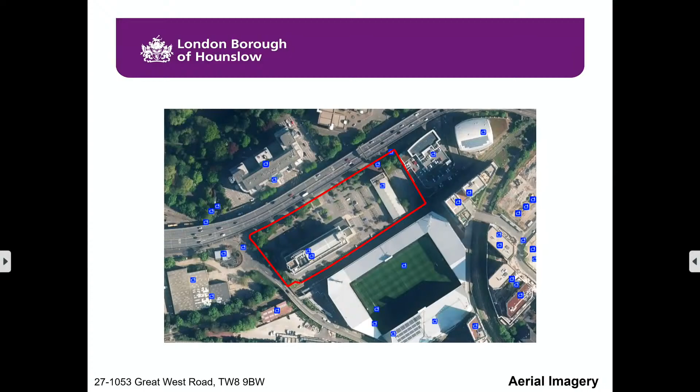27 Great West Road, now shown on the screen, is a 7-story multi-let office building that was formerly the Sega HQ. It's comprised of almost 12,000 square meters of office floor space and has the frontage and vehicular access from a roundabout on Lionel Road South. The building is currently only partially occupied.

1053 Great West Road is a part 1-story warehouse comprised of 1,481 square meters of floor space, with the lawful use being Class B8.

The site is within the Great West Corridor opportunity area, which is allocated to deliver 7,500 new homes and 15,000 new jobs. An outline of the opportunity area is now shown on the screen.

The site is also proposed to be released from its existing LSIS designation within the local plan review and is to be allocated Site 28 within the emerging local plan to provide a minimum of 500 homes, 990 square meters of retail floor space, and 18,870 square meters of business floor space.

This emergent allocation is considered to have moderate weight in the determination of this application due to its relatively advanced stage, with the local plan review now submitted to the Secretary of State.

The proposed development would accord with the majority of the requirements of the site allocation. It would deliver an appropriate quantum of housing together with 1,195 square meters of retail and F&B floor space and 4,259 square meters of industrial floor space that would meet identified need and provide employment floor space in line with the objectives of the allocation and the opportunity area.

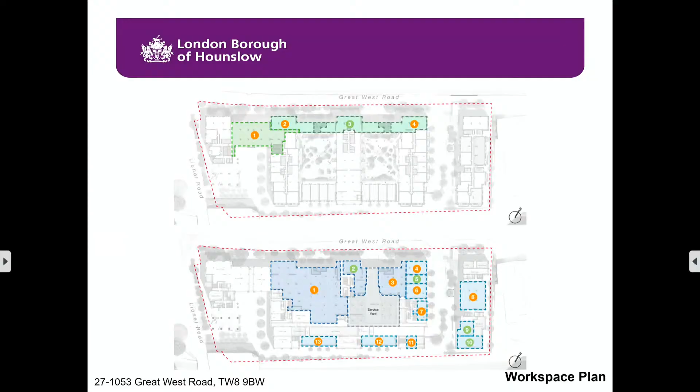The scheme would also provide active frontage to the Great West Road and the new public square, and would successfully co-locate the delivery of new homes with the continued provision of employment space, therefore positively responding to the allocation.

The scheme being presented this evening is the product of a close to 2-year determination period, with 13 PPA sessions between the council and applicant prior to submission and over the course of the determination period. The meetings held during the determination period focused on building heights, townscape and heritage views, urban design, placemaking and built form, residential quality, affordable housing and viability, environmental impacts and the public benefits.

These discussions were also informed by the consultation responses from statutory and key stakeholders.

Wholesale amendments were then received in November 2024, which included the reduction of height across blocks A, B, C and D of up to 20 metres, reduction of 60 homes, increase in height of block E of +3 stories, podium setback up to 6.5 metres away from the Great West Road, introduction of a new arcade link between the Golden Mile Square and the Great West Road.

Additional TfL safeguarding land, increase in public realm and open space, increase of communal amenity space, 12+ play space provided on site, and the affordable provision maintained at 35% with an increase in social rent based on habitable room calculations.

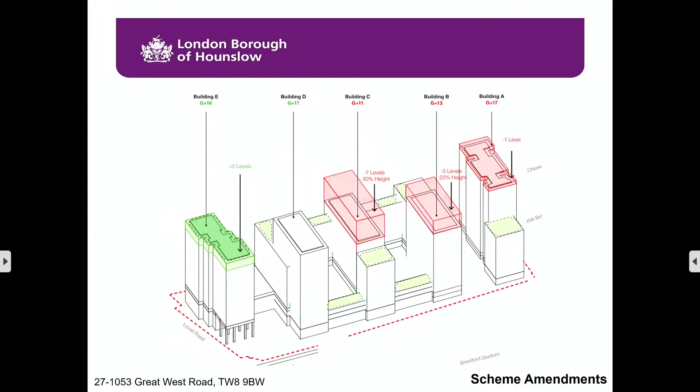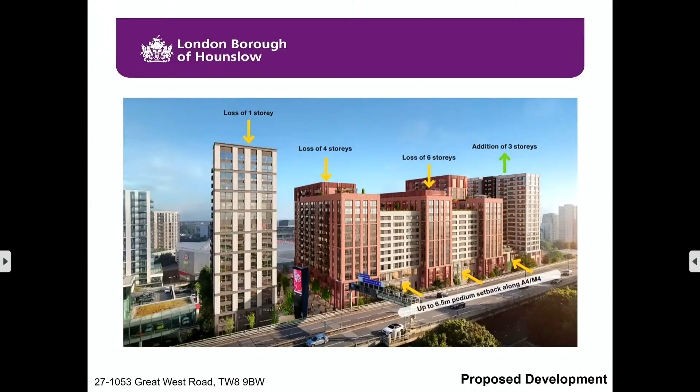Further amendments were also received in July 2025 to address objections from Brentford Football Club related to counter-terrorism, following a series of meetings between the council, the applicant, Brentford Football Club, and the counter-terrorism security advisors, the CTSA, who are part of the Met Police.

Following the submission of the revised scheme with relocated balconies, Brentford Football Club removed their objection to the proposal and provided a letter setting out their support for the scheme on the basis that the following conditions and obligations are secured: restricting the hours of construction work, restricting access to the roof space and roof terraces during match days, the recording of fob access subject to balcony screening being installed prior to occupation, and management agreements for the construction and operational phase.

These conditions and obligations have been agreed by the applicant and shall be secured by the permission and associated legal agreement. Given the club and applicant are in agreement regarding the proposed mitigation measures, and subject to the conditions, the CTSA do not object to the scheme in this regard.

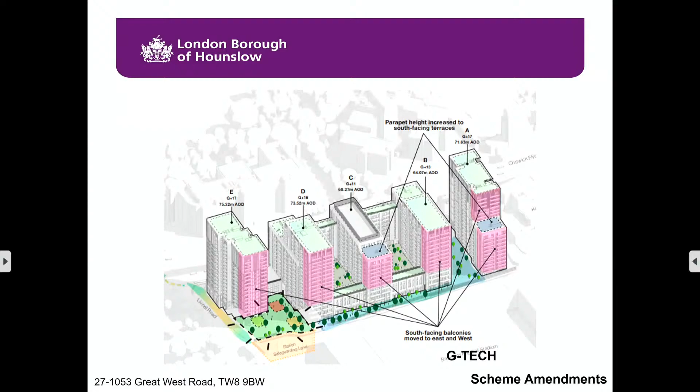Conditions will also require the submission of further details in relation to the public square and will require a gold Secured by Design accreditation to be achieved.

The clean air route is also shown along the southern side of the site to provide pedestrians with an alternative to the Great West Road. The proposal would also safeguard the land for the development of the future Lionel Road station, as shown on the bottom left-hand side of the screen.

The overall provision of affordable housing would be comprised of a 49-51 split between social rent and shared ownership homes on a per unit basis, and a 52-48 split on a habitable room basis, equating to 130 social rented dwellings and 136 shared ownership dwellings.

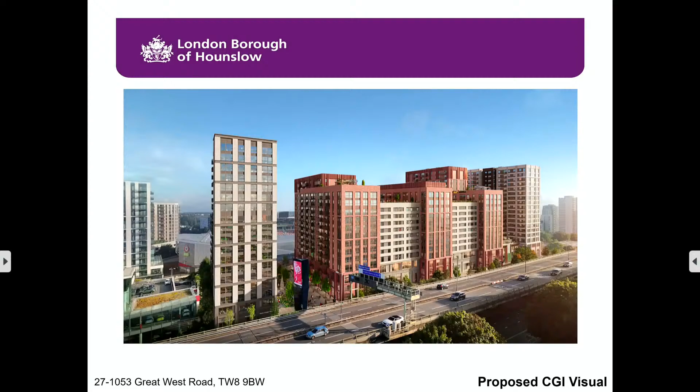On balance, it's considered the height, scale, and mass of the proposed development would relate successfully to its context, while optimizing the development capacity of the site and seeking to protect occupiers from adverse environmental conditions. The materiality and detailing, the identity and character, movement patterns, and landscape design all ensure that high-quality development would be delivered.

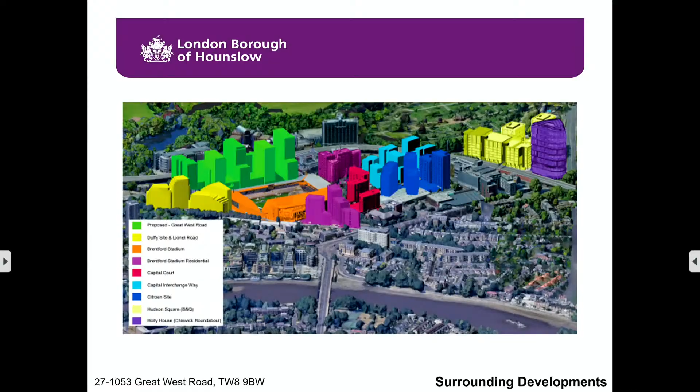For the heritage impacts, the significance of the affected heritage assets and the full objections received from consultees are set out within my report. But to remind members, objections have been received from Historic England, ICOMOS - the International Council on Monuments and Sites - Royal Botanic Gardens Kew, the Kew Society, the Gardens Trust, Historic Buildings and Places, the GLA Conservation Team, London Borough of Richmond upon Thames, and the Strand on the Green Association.

Starting with Royal Botanic Gardens Kew World Heritage Site and the assets within it, the amendments to the massing and scale of the proposal sought principally to further reduce or, where possible, remove the impact of the proposed development upon the setting and the outstanding universal value of Kew Gardens World Heritage Site.

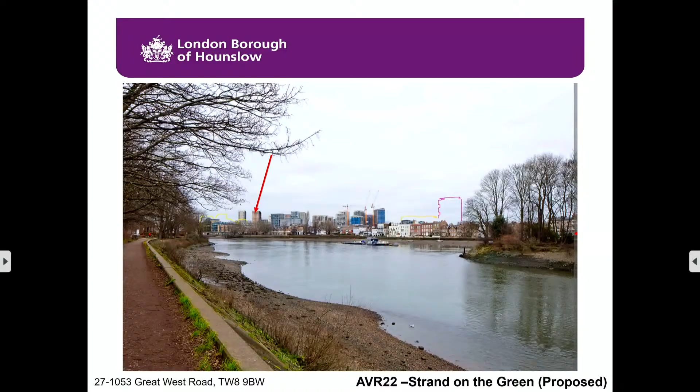Enhanced single aspect units incorporate secondary openings, and some other single aspect homes have oversized internal floor space, generous floor to ceiling heights, and oversized external amenity space where appropriate. Mechanical ventilation and cooling measures further ensure a high standard of internal environmental quality.

The daylight and sunlight assessment demonstrates that the majority of homes in the scheme would achieve appropriate levels of natural light. Where shortfalls occur, they are relatively minor and often mitigated by design features such as balconies and generous outlooks.

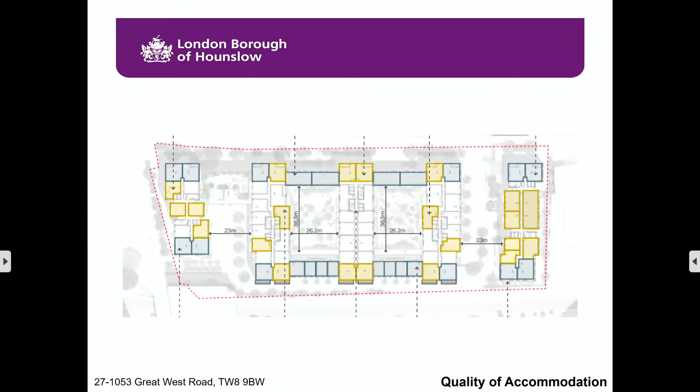Given the site's urban context and its allocation for significant growth and the benefits of delivering high-density housing in a highly accessible location, the scheme is considered to provide appropriate daylight and sunlight levels for future residents and represents a balanced and acceptable approach.

The primary aspect of the proposed dwellings would be to the west and east, with secondary aspects to the north or south, depending on the location of the individual homes.

The figure on the screen illustrates the separation distances between the proposed blocks, showing distances between 23 and 36.3 meters from each other, comfortably exceeding the 18 to 21 meters recommended as acceptable residential relationships.

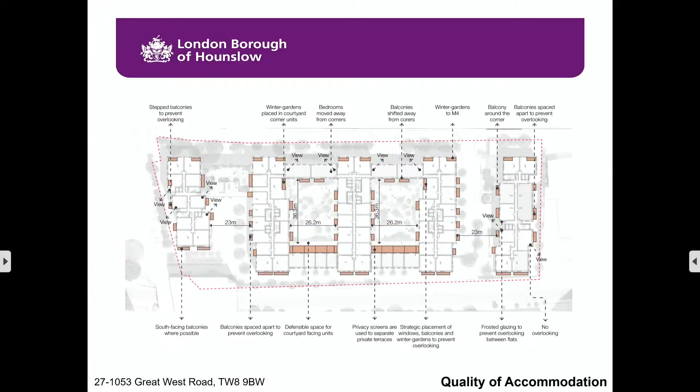The position and orientation of existing habitable room windows in the vicinity of the subject site would also ensure that future occupiers would have adequate levels of privacy, and all dwellings would be afforded with sufficient outlook.

The submission demonstrates that existing and future levels of noise and vibration associated with the freight line, as well as the future WLO station, WLO line, and the noise from the Gtech Community Stadium would be appropriately mitigated in accordance with the agent of change principles.

All 856 units across the development are expected to comply with Part O overheating risk after the proposed passive and active measures are applied, and the new homes would not be exposed to adverse air quality conditions.

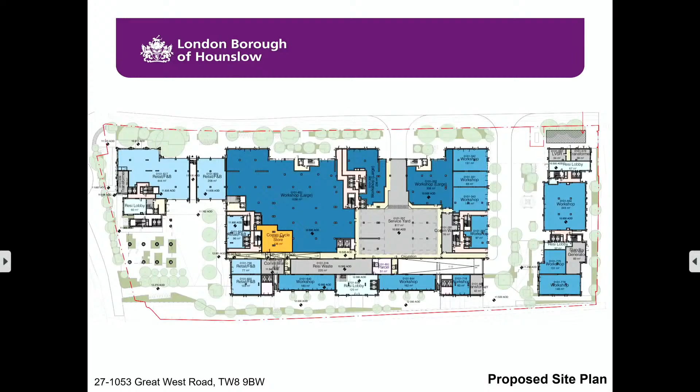Of the 30 blue badge spaces, 28 would be designated for the residential element, while 2 would be allocated for commercial staff. 20 EV charging stations would be installed, with the remaining fitted with passive provisions.

For the residential element, the proposal would provide a total of 1,324 cycle parking spaces, split 20% Sheffield stands, 5% extra large cargo spaces, and 75% two-tier stands, although this does fall short of the policy requirement by 190 spaces.

The design and layout of the cycle store have been developed with the intention of providing a suitable split of Sheffield stands, as well as standard separation distances to ensure the cycle stores are sufficiently accessible.

Given the constrained nature of the site and the context of the development, it's not possible to increase the quantum of parking without compromising accessibility. Given this, coupled with 87% of the policy requirement being delivered in an accessible layout, the quantum is on balance considered acceptable.

The travel plan, which shall be secured through the Section 106 agreement, shall also include monitoring arrangements to ensure that further cycle parking could be introduced should demand dictate.

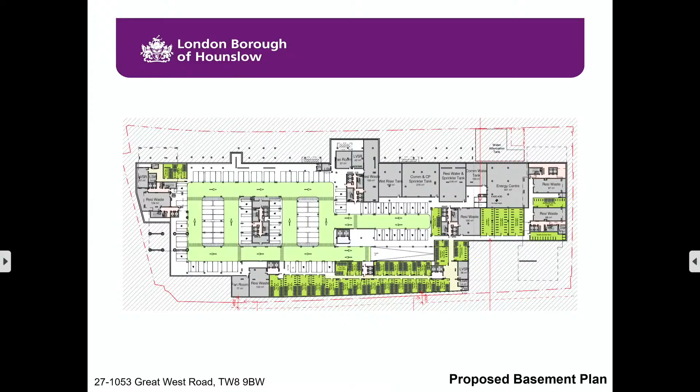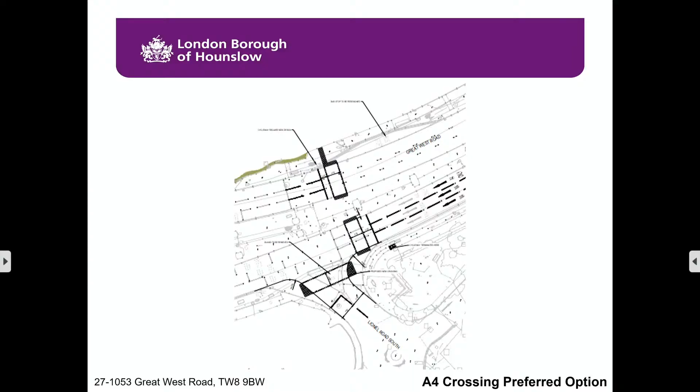The submitted active travel zone assessment, carried out across both daytime and nighttime, sets out the key pedestrian and cycle links in the vicinity and the quality of existing infrastructure. The ATZ assessment also provides a variety of suggestions that should be implemented to mitigate these issues, which will be secured through the Section 106 agreement.

Turning to the planning balance, the framework sets out that where development proposals cause less than substantial harm to heritage assets, the harm must be weighed against the public benefits of a proposal, including where appropriate, securing its optimal viable use.

There are significant benefits for the scheme related to housing delivery, affordable housing, the optimization of brownfield land, public realm enhancements, the affordable workspace, the A4 crossing and Gunnersbury improvements, and sustainable and active travel, while there are also moderate benefits through employment and commercial space, high quality accommodation, townscape enhancements, energy and sustainability, and environmental benefits.

Whilst the proposal would result in harm to heritage significance, this harm is outweighed by the substantial planning public benefits set out in my report. The scheme makes optimum use of an underutilized brownfield site within an opportunity area, delivers much needed homes and affordable homes, enhances connectivity and public realm quality, and the application and associated listed building consent is therefore recommended for approval.

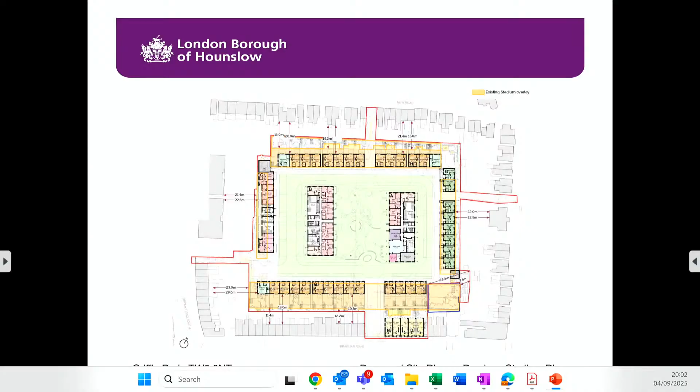This is an overlay of what has been approved back in 2014, which I should add has been in part implemented. So it is an extant planning approval on the site versus what is being proposed as part of this current scheme.

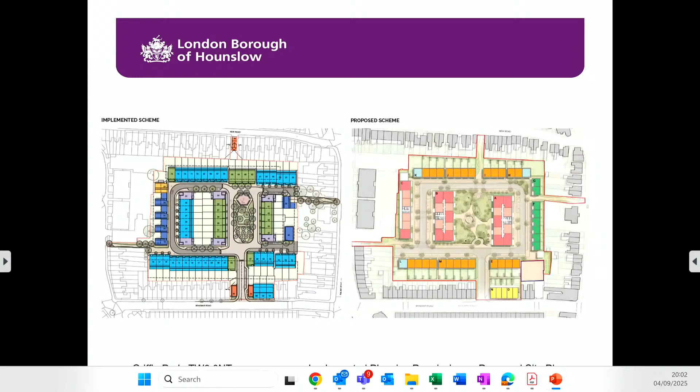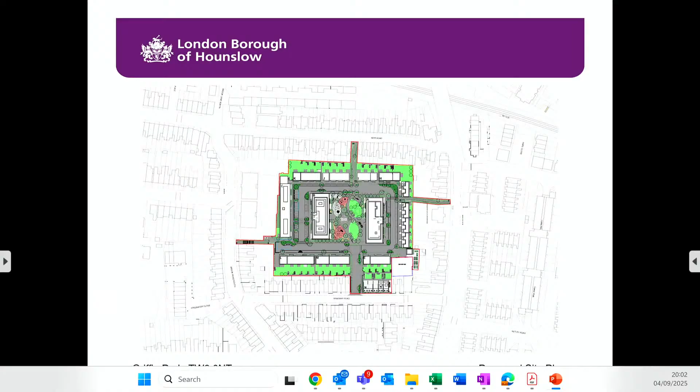Moving on to the current scheme, this is the aerial view of what it looks like. In the centre you have an area of landscaping, and the green section is the landscaping serving the homes. As part of it, there are 3 main blocks, and then terraced houses around the outside of the site, which is explained in more detail in this plan.

Central to the site there are 2 six-storey blocks, 5 stories with a setback at 6th floor level. Around the site, on the western side is a block which is 4 stories tall, and on the eastern side is a block that is 3 stories tall.

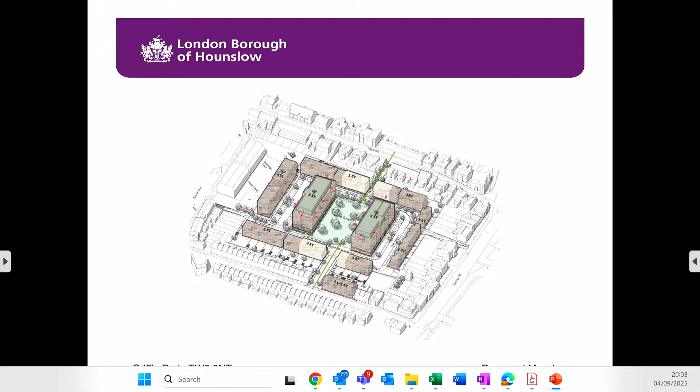This is what the buildings to the south of the site look like, the 3-storey terrace buildings, adjacent to and fronting onto Braemar Road. Some of them sit behind the existing terraced homes on Braemar Road, and there is also that block that fronts onto Braemar Road next to them.

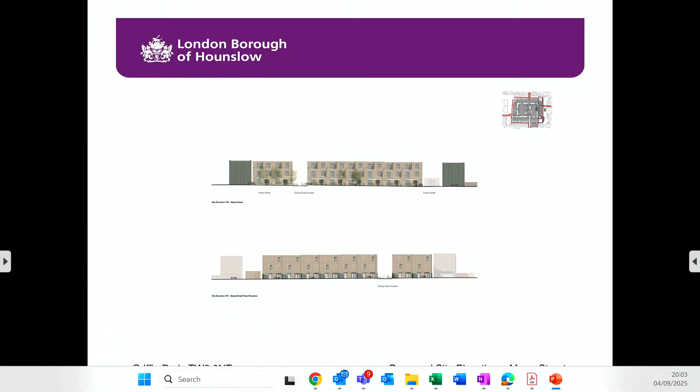This is to the north of the site - sorry - these are the 3-storey buildings to the north of the site. And then this is the east of the site. This is the north of the site again, 3-storey buildings.

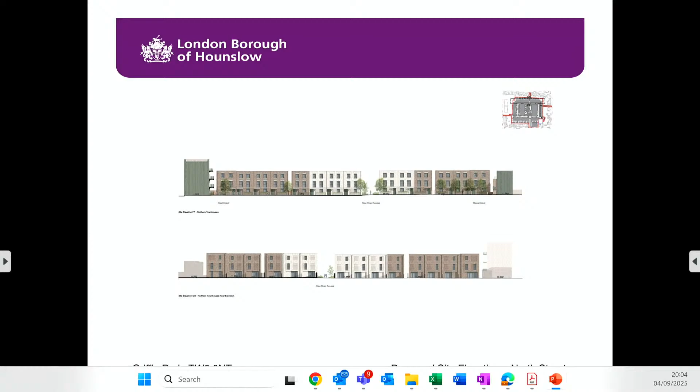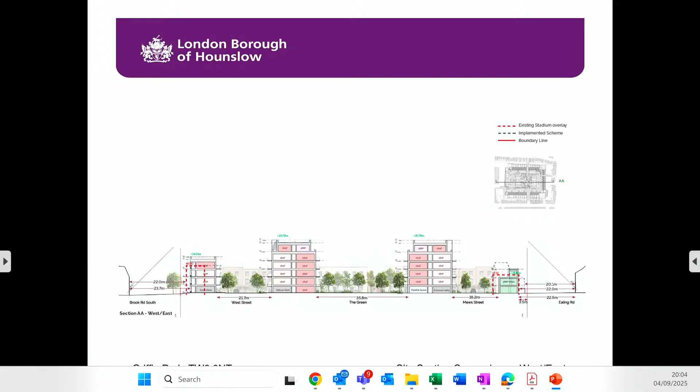And then some site section comparisons. The officer has input these slides, which reasonably well show what the existing outlook was for residents when the stadium was on the site. That's on the left-hand side - what the residents looked out to while the stadium was still there. Then there is the extant implemented permission, which is the centre slide, and the proposed on the right-hand side.

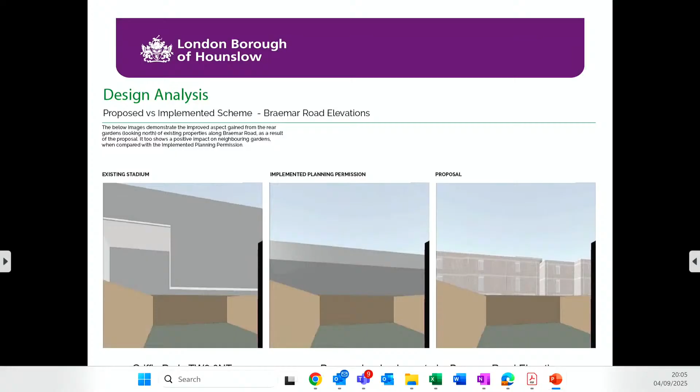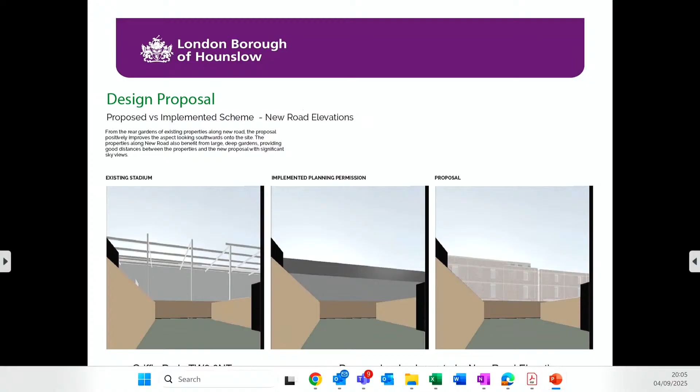This is what properties on Braemar Road previously looked onto, what they could look onto, and if this scheme is approved, what they will look onto should it be built out. This is a similar overlay from the New Road side, to the north of the site, showing what properties look out onto in those scenarios as well.

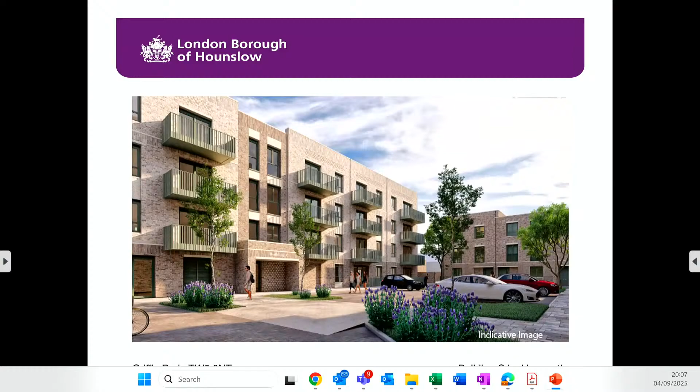Now we've got some views of the terrace and on the inside of the site. These are the mews buildings to the north of the site. This is building C, so this is the building to the west of the site looking into the site. And this is the buildings from Braemar Road.

On acceptable and sustainable ecological grounds, 121 trees are proposed for the site, 295 cycle parking spaces spread across the buildings, and 64 car parking spaces. There was no one speaking tonight, but there were 24 objections, so I will give reference to them and suggest that we believe we've overcome them through this presentation. Objections included overdevelopment, too tall, out of keeping with the area, light and privacy, noise, parking, traffic, infrastructure, and social housing.

So again, social housing: there is an affordable housing contribution as part of the scheme, which is for 30 units at discount market sale, so 25% off the market sale rent. What is important is that the extant approval that is in part implemented has no affordable housing on the site. The reason for that was it was based on the wider scheme, affordable, as part of the stadium development, affordable housing was proposed elsewhere, so it did not form part of that proposal.

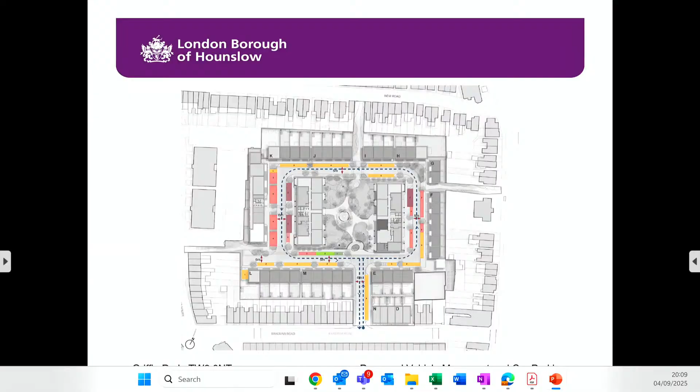Thank you. Any more questions? Nope. Should we go to debate then?

So, just a quick question about the... it's a pity we haven't got anyone here from the developer. I just noticed all the affordable are in the 1-2 bedroom categories, there's nothing bigger. Sorry, Councillor, are any of you from the developer? But they're not presenting. No, that might be able to answer a question if the chair would.

Is that okay, Jimmy? It's chair's discretion, so... Yeah, if you don't want to answer a question, you can. Okay, as soon as you're here.

We just noticed that all the affordable is at the smaller end of the market, the 1-bed, 2-bed, and the overall affordable is not particularly high. Why did you decide to make the majority or all of the affordable in the 1-2 bedroom range? Was there no possibility of giving 2 or 3 bedrooms as affordable? Because as you'll probably know, and it was highlighted in the last presentation, larger family accommodation is where we do have a pressing need in the borough.